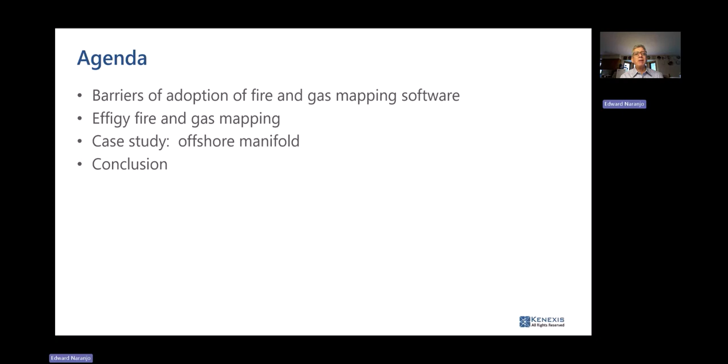In the agenda for today, I'll talk specifically about some barriers of adoption on fire and gas mapping software. This is important for us to keep in mind because it will drive the context of the rest of the presentation. I'll talk also about what is particular about Effigy that makes it well suited for fire and gas mapping, and for addressing those very challenges that I mentioned in the previous section. I will have a case study of an offshore manifold that will speak on how Effigy can work and how it can make a certain difference vis-a-vis other fire and gas mapping tools. And then I'll have some concluding remarks.

So to begin with, there has definitely been a step change in addressing detection coverage when we use computer models. Before computer models, we were relying on heuristics, best practices, certainly some rules of thumb that had some basis on science. For example, the molecular density of a gas, some calculations on radiant heat output for fire, the size of the fire, for example. But there are so many different variables to consider that no one heuristic method can fully address those complexities in a chemical process environment, most of which happens to be outdoors.

So when computers began to become more available for these particular types of applications, certainly something great happened, and that is the development of full scenario calculations that allowed us to understand precisely the effect that having detectors at a particular place would have in the reduction of overall risk.

Understanding also, and I would say manipulating the information in a way that could not have been done before, whether it was through such techniques as volumetric monitoring, point source monitoring, or even path of travel and target receptor monitoring. All of these are very useful heuristics, but they do not hold a candle to computer models.

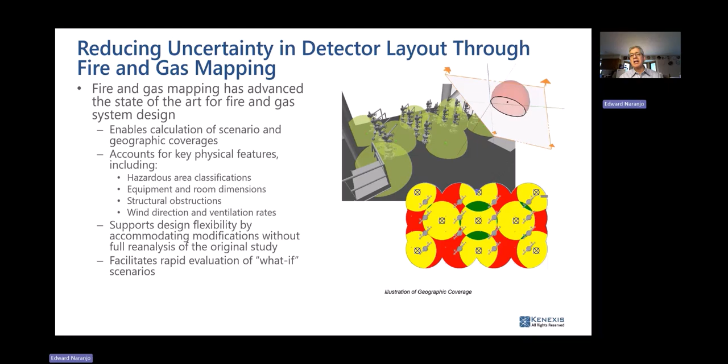That's something that is quite difficult to do for the previous methods. And lastly, I think that something that is very difficult to do on heuristics is to do evaluation of what-if scenarios. If you have a particular change that is coming, if you are creating, for example, a new process facility that is adjacent to the one you have, and you want to calculate what effect that will have. If you're adding, for example, a new piece of equipment, how will that change the obstruction of the space? All of that is much easier to do when you have a 3D model and you are able to calculate scenarios and detection coverages based on that.

Now, the other thing that we are, I would say, grateful for as a process safety profession is the advancement of standards related to fire and gas mapping. The first one that comes to the fore is a technical report, ISA TR84.00.07, which is the guidance on the evaluation of fire, combustible gas, toxic gas system effectiveness. This one is modeled after IEC 61511, or ISA 84, and it uses the assessment of risk and risk reduction almost as a basis. So if you are familiar with IEC 61511, there are certainly some similarities between the technical report and the standard.

Another standard, or norm, that has advanced our state of the art is Annex B of NFPA 72. The National Fire Protection Association has had the National Fire Signaling Code for many years, and it is one of those prescriptive standards by design. But over the years, it has added Annex B, and developed it further and further. And if you look at Annex B, it really has become its own performance-based approach, and it in itself is based on a handbook by the Society of Fire Protection Engineers. So it's very good that we're seeing the advent of these performance-based norms.

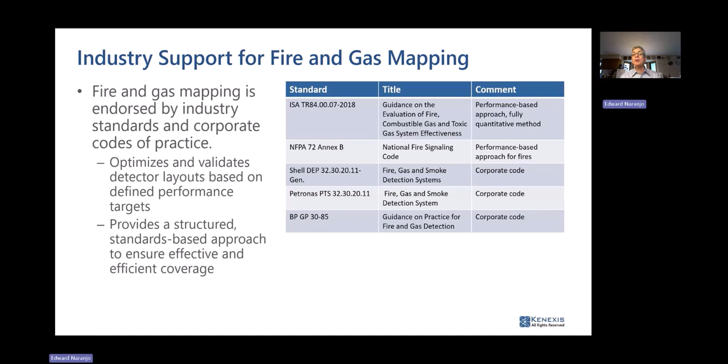And I would also have to give credit to some early pioneers in the business, like Shell and BP, who have developed their own performance-based codes within their corporate codes of practice, and those are listed here as well. So I would say we cannot look at computational models in isolation. They are in fact driven by the way in which people must behave and the documents that they must produce as a result of a particular type of action. And those are really codified in these standards.

However, despite the advent of computing and the advent of very good standards, there are a number of challenges for the implementation of fire and gas mapping tools. You would think that, especially now, there would be widespread adoption of these type of digital tools. That is not the case. And there are certainly some barriers that we must address.

One of them, at least in my view, is the perception of a requirement for specialized technical expertise. Certainly, computer models cannot be done or managed by people who have no particular education. It does take some amount of training. And I would say that has led some lay people in the industry to think of this as being a niche field.

Also, there is the notion that there's a high cost for implementation of these fire and gas mapping tools. I hear this quite a bit. I go into the field and someone is asking, well, I believe that we need to map this particular space. I don't feel confident here. However, I am just going to use what I know, which is my rules of thumb.

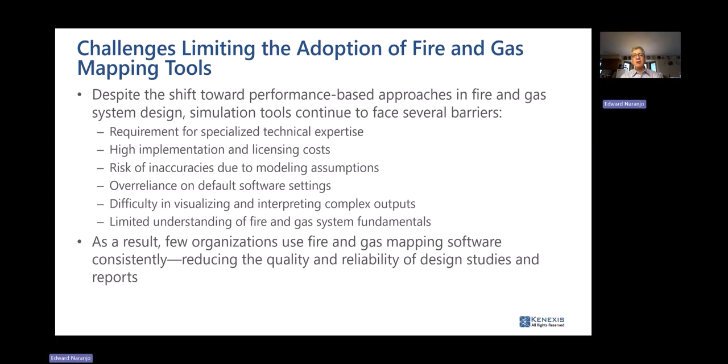So what can be done about it? Well, at Kenexis, we have taken an approach that I think is quite suitable to address these challenges, and our software tool does that particular job of addressing these challenges. Let me refer to them one by one.

The first is that it integrates the workflow of ISA TR84.00.07. That's important because having that structure allows the user to see that fire and gas mapping is not about fire and gas mapping only. There is a process. In fact, the modeling is just one step out of several that need to be done for a fire and gas hazard assessment. I think this is important because you cannot take 3D models and computation in isolation. If you use the norms as a guide, that will help drive that context.

So as pointed out here on the workflow, one must identify areas of concern, must identify the risk. One of the important parts is to assess and mitigate hazards or risks. So you have to know what is your hazard and what are the consequences of those hazards before applying your safeguards, in this case your field devices, your array of field devices, placing them in such a fashion that they will help reduce a certain risk. And then you need to calculate what is going to be your fire and gas system effectiveness after you have established those detectors in that place, the fire and gas system effectiveness with mitigation.

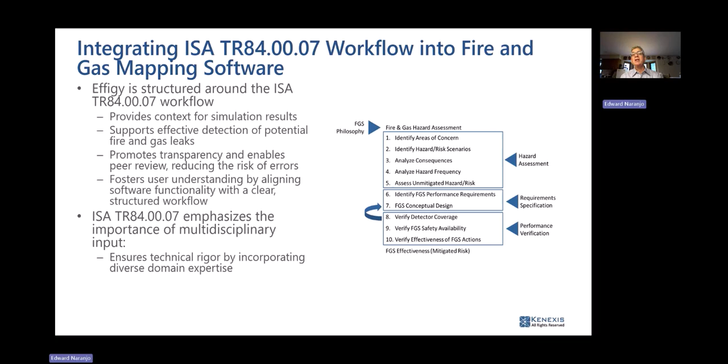So a second way in which the tool addresses the challenges is that it is fairly accurate because it relies on physical properties of the gas and the fire in order to model their particular risks. This is extremely important. In the specific case of Effigy, it uses radiant heat emitting bodies, the energetics of fire, as an input for fire and gas mapping. This is important because a majority of fire and gas mapping models, certainly those available commercially, use what is called a ray casting method.

Ray casting means that it relies on consideration of obstructions and space. If a detector is obstructed in its field of view by an opaque object, then the understanding, at least in the model, is that there is going to be no coverage or no detection behind that object. This makes perfect sense in a variety of different cases, which is why a number of tools use it.

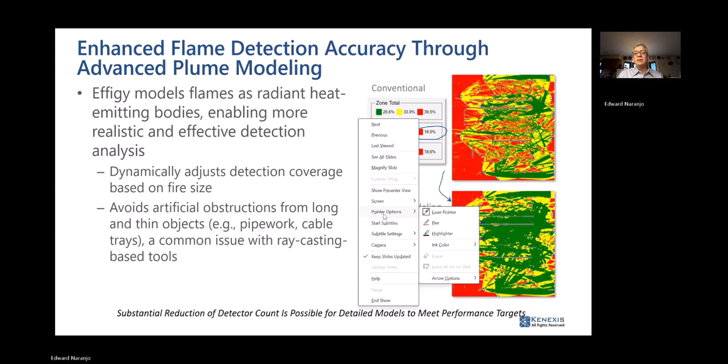Another advantage that I see with the use of Effigy as a modeling tool is that at Kenexis, we are not only the developers of the tool, but we are their first practitioners. As a matter of fact, I think our company has been a pioneer in fire and gas mapping. It has used fire and gas mapping for well over 15 years.

Ed, as well as others, have been voting members of ISA TR 84. In fact, many of the principles that the company applied were incorporated into the technical report. We have a number of studies that we have conducted over the years, over a wide variety of industries and several different processes, and it has been that experience that has informed decisions on the development of Effigy.

So it's not a tool that was developed in isolation. The company's employees are first and foremost engineers, and I think that shows on the final tool. Another advantage I believe you will see is that the field devices it models are not only your conventional flame and gas detectors, but also newer types of devices such as infrared gas imagers, ultrasonic gas leak detectors, as well as open path toxic gas detectors such as the ones made from tunable diode lasers.

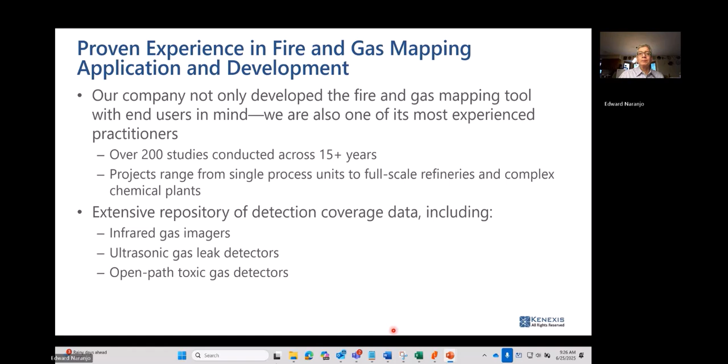Another innovation that I think helps the adoption of fire and gas mapping is that the tool is cloud-based, meaning it uses servers that are outside of a desktop. The very first tools developed in the early 2000s were desktop computer models, and they have several limitations, especially for some of the most complex fire and gas mapping projects.

It's certainly very, very difficult to do it on a desktop, even in computer rooms that were on premise at the time. And some of these computations can take days to do.

You will see right now, if you have had the chance of using Effigy before, most of the computation can be done in a matter of minutes, certainly not days upon days in a row. And that does make a difference when you're working on a project, especially when you have to work on a deadline where fire and gas mapping is just one of several tasks that need to be done.

Effigy leverages the Microsoft Azure high-performance computing framework, and it just makes resources available. I don't think that we have ever been constrained by using high-performance computing from Microsoft.

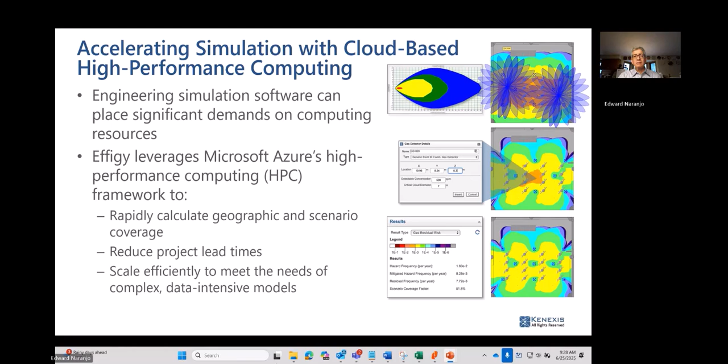So all of this is fantastic. You can see that these are certainly some reasons for removing such barriers as the ones that I mentioned earlier. But the proof is in the pudding. What can we do in a real life scenario?

I wanted to show you one, and that is a fire and gas mapping project that we had on an offshore oil platform. As you might imagine, the platform is producing crude oil, and crude oil comes from the ground as a mixture. It's not only crude oil itself, it's a two-phase fluid. It has water, it has natural gas. It probably has a number of other impurities.

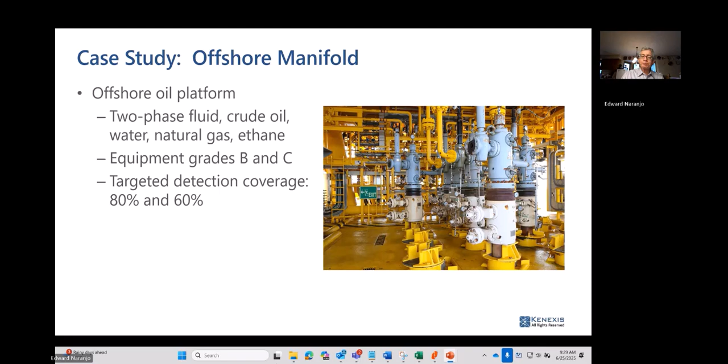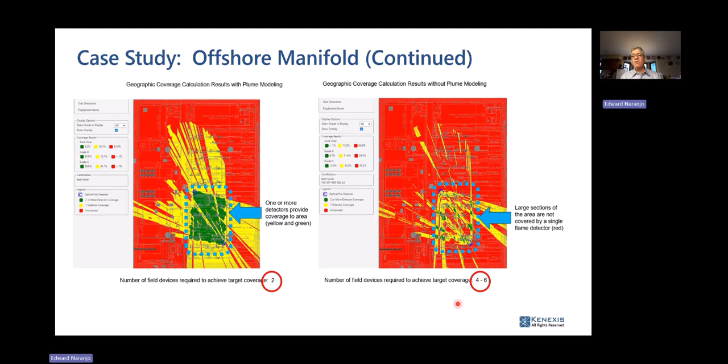So with that, I just wanted to recap some of the important points. I would say fire and gas mapping software has been a tremendous advancement for process safety. It certainly has increased the certainty around the layout of flame and gas detectors, and it is head and shoulders above heuristic and even prescriptive approaches.

That being said, adoption is still a sticking point. There are a number of challenges: there's complexity, there's cost. And I think in many instances, it's just the idea that computation can be done without regard to other steps that are needed for good mapping.

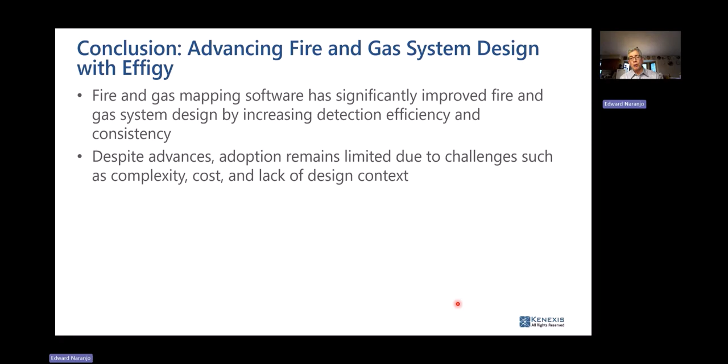I would posit that Kenexis Effigy software addresses many of these challenges head on. It follows a premier norm, the Technical Report 84.00.07. It uses the very same framework, and that framework helps give guardrails or guidelines to the end user, so you're not using the software indiscriminately. The software itself guides you through the process. I would say it also fosters collaboration across multiple disciplines.

I pointed out how detection coverage is improved as a result of the Plume modeling approach that we use. As a result, far fewer detectors are needed in installations that have long, thin obstructions. And lastly, it uses hosted servers that make it easy for projects to be done in far shorter lead times than either on desktop models or even on-premise servers.

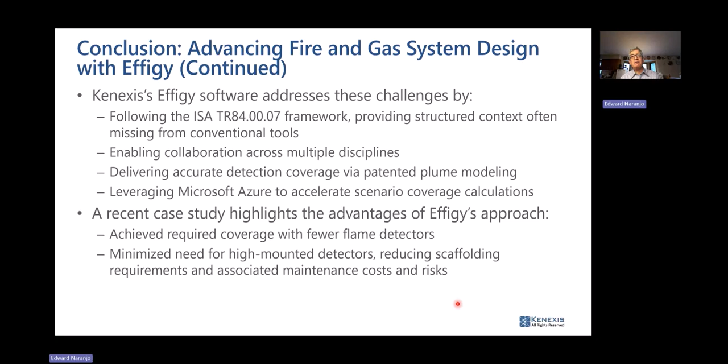The case, I think, is well illustrated with the offshore manifolds, where we achieved detection coverage with only 2 flame detectors in an area where 4 to 6 flame detectors would be needed otherwise. I cannot underscore this point enough, because especially when it comes to an offshore installation, there is a significant cost associated with every additional flame detector or any device that is added. It's not only added weight, it is added maintenance, and it is far beyond the cost of the actual device itself. Any questions?

We've had some questions in the chat here, Edward, that Ed's been addressing. So I'll just mention that there are some questions around some of the settings in Effigy to adjust sensitivity regarding modeling of flames as radiant heat emitting bodies.

The response is yes, it's an input for radiant heat output, and it's a requirement for the fire modeling. You can adjust that as well to analyze a specific scenario where you want the fire detector to be more sensitive. That is absolutely true.

So Effigy has a database of detection coverage and specifications for a number of commercial flame and gas detector models. For flame detectors, many of the commercial models have sensitivity settings. That's not unusual, they typically have 3 to 4 sensitivity settings, and those could be adjusted. Of course, those are going to change detection coverage.

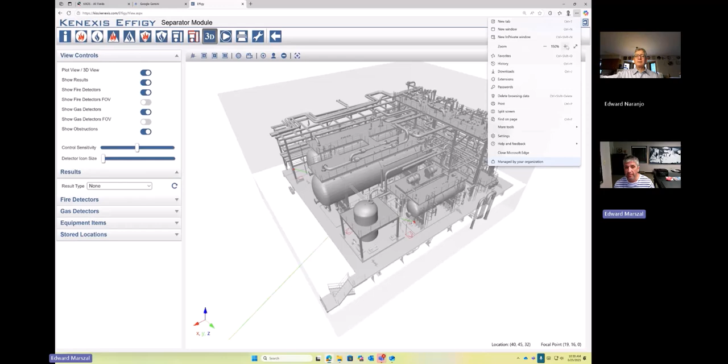A view of Effigy. I'm just looking at a separator module here in the 3D view, and you can see that I've got a few fire detectors laid out on the screen here.

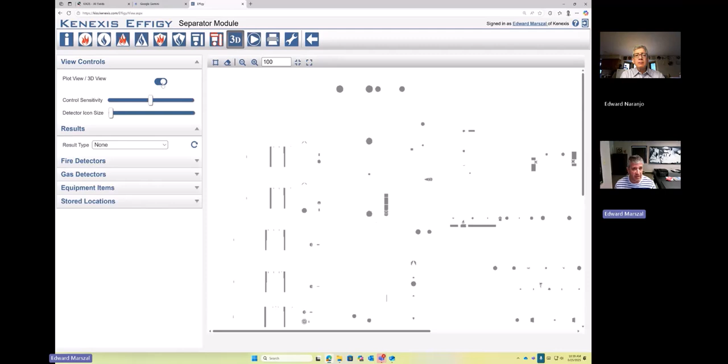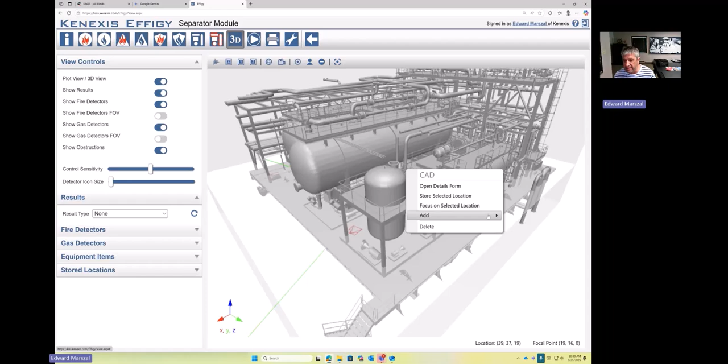Now, you can see the detectors and the mechanism to lay them out. There's a million different ways to lay out detectors. Probably the easiest one is to just look at a top-down view, then right-click and add a new fire detector, and it'll put the detector in that location. But if you want to attach to pieces of equipment, using some of the more sophisticated 3D tools to add equipment onto surfaces and so on, that's a better way to do it.

But with regards to the specific questions, you see there are some detectors around. So over here on the left-hand side, you're going to see a list of the detectors. The first one is fire detector 1, and I could click on it to open up the details.

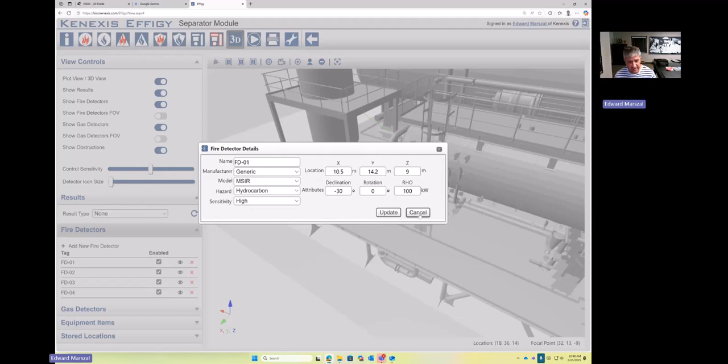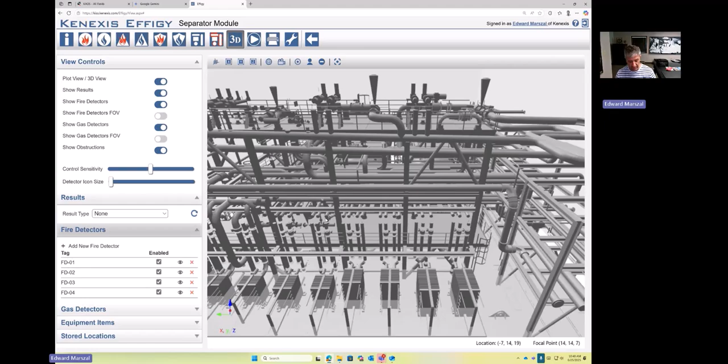But before I get into that, you'll also see this eye icon, and when you click on that, it's actually going to put you inside the detector so you can see what the detector is looking at. As I scroll back, you see the back of the detector and where everything is at in relation to the full 3D model. You can go back and look around, and you'll see that this is a really densely packed area, but there's still a lot of spaces where you can see detection.

Now for the detector itself, when you click into the form, there's all kinds of things you're going to define. First off, when I just did a right-click on the plan view, all it knows is the X and Y coordinates. When you do the more sophisticated 3D approaches to attaching the equipment, that's going to give you the Z direction also.

There's a declination angle, which is the angle from horizontal, so minus 30 means we're pointed 30 degrees down from horizontal. Rotation is about the XY axis.

And here is the answer to that first question that was in the chat, which is, can you define how big of a fire, essentially? So 50 kilowatts is a number that's used in a lot of corporate standards, and that comes from the FM 3260 test, which arbitrarily is a 1 foot by 1 foot pan of heptane. Now, 50 kilowatts is an approximation - it's actually closer to about 43 kilowatts that size of fire is kicking out.

So if you want to detect a smaller fire, like maybe one that would fit in this cup, that's going to be maybe about a 10 kilowatt fire. Whereas if you're in a big warehouse application, you don't care about the fire until it gets really big, so maybe you'll want to use 300 or 400 kilowatts. That radiant heat output setting is going to change the dimensions of the cone of vision using thermal heat transfer calculations, radiative heat transfer calculations - whereas our competitors who are just using ray tracing, all they're doing is geometry.

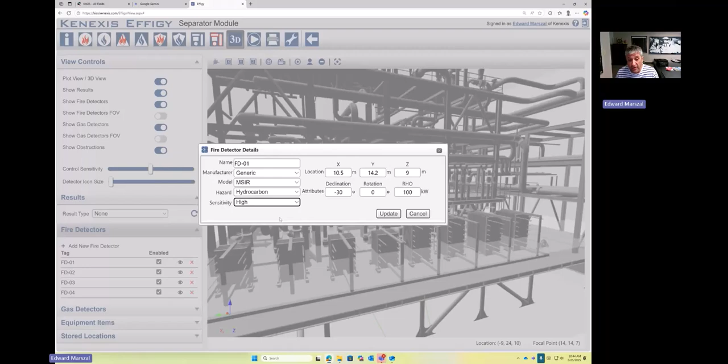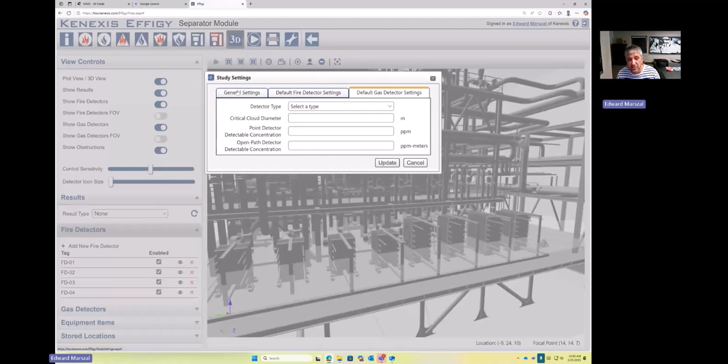Now, the last question had to do with settings. So right up here is the action ribbon or the navigation ribbon along the top. You can click on the study settings button, and it's going to give you default settings for fire detectors, default settings for gas detectors, but then also the general settings of how the software works. So you could do all kinds of customization, like showing tag numbers on the drawings, tool tips, determining the different types of styles of icons that you want to use for your detectors.

And then ultimately what we were talking about here was point source versus plume. Point source is something that is going to be more akin to a point-by-point ray tracing that doesn't consider fire size, which is kind of the state of the art for our competitors, but is the absolute worst level of performance for our software. You can make things much, much better.

So instead of using point source, you can use Plume. And when you shift to Plume, you're going to need to define what the plume size is. Typically, if you're using 50 kilowatts, that's going to be representative of a 1 foot by 1 foot pan fire, which at its base is going to be 1 foot by definition, so about 0.3 meters. And the height is going to be about 3 feet, or about 1 meter, is what you would typically use if your target fire is a 1 foot by 1 foot pan.

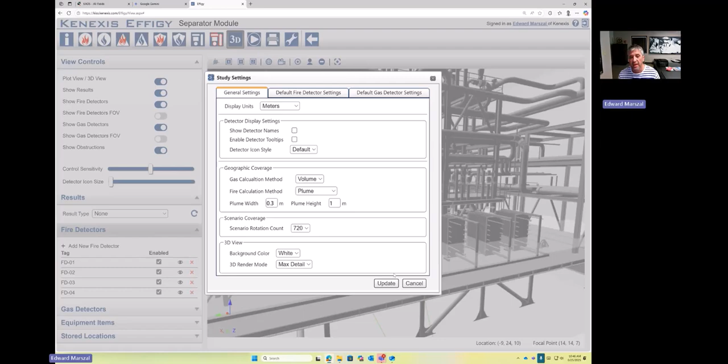So then you hit Plume, you do that, you hit the update button, and now we're in the plume detection mode. So I believe I answered all the questions about how you modify the settings for different fire sizes and the use of plume. Did that sufficiently answer the questions? Or did I not get to the answer?

I think you have answered that. We did have another one come in. When you set the result type in the 3D model view to fire geographic coverage, could you limit the coverage results shown to be only limited to your desired grading area instead of showing the whole area?

Okay, since I hope you don't mind me stepping on your presentation, Edward, but I had the software up on my computer. Yeah, no, go ahead. I think people like to see the software illustration in action. Yeah, so when I go to result type, I can show...

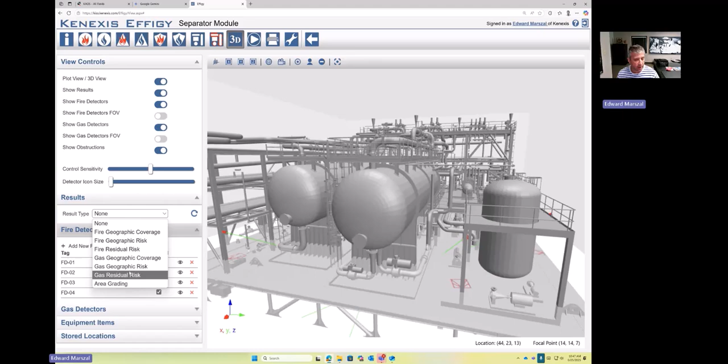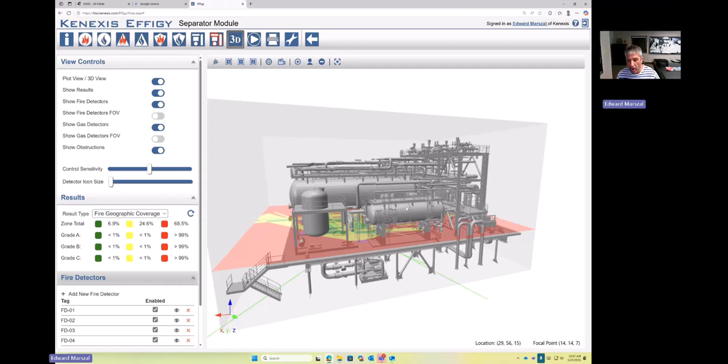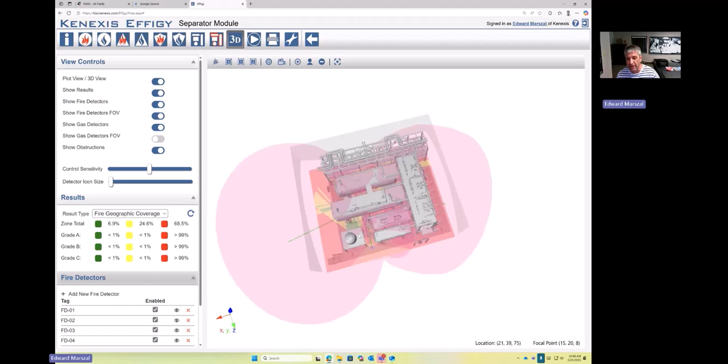Fire geographic coverage is the way we commonly do things. And again, now we're going to be displaying our results for the plane that we selected, which is the elevation — I'll go back in a second and show you that. Now, even though we're showing results on one elevation to make it feasible for you to work with, we can show you those results fully in 3D. So if I show the fire detector cone of vision fully in 3D, there it is. I don't know what you're gonna do with all of that information.

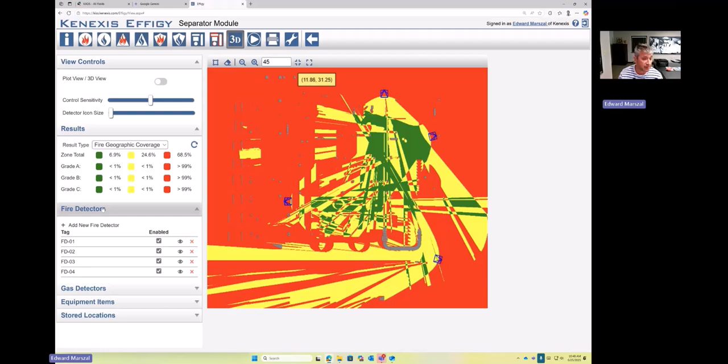So that's why we tend to put things down on the two-dimensional level. If I could see that on 2 dimensions, this is a little bit easier to look at. Now, the question was, what does that mean for the graded areas? Honestly, I don't even know if I defined any graded areas here.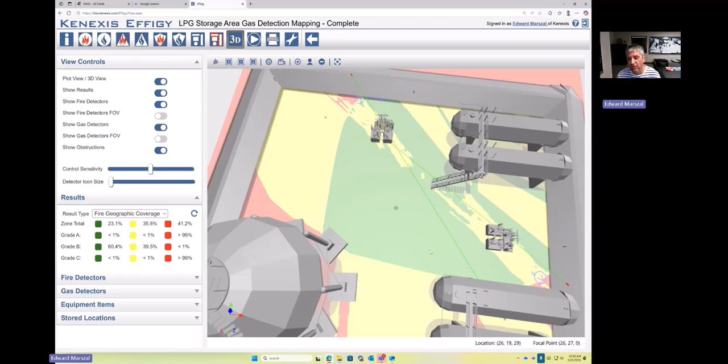Now I'm going to go to this facility, which I know has graded areas and also has fire coverage. So there's my area grading. And if I look at my fire geographic coverage, it's for the whole plant, but the graded areas are actually very small. Now, if I only want to see what the coverage is in the graded area, I'll have to go to a different view where I look at the fire geographic coverage in its own special 2D.

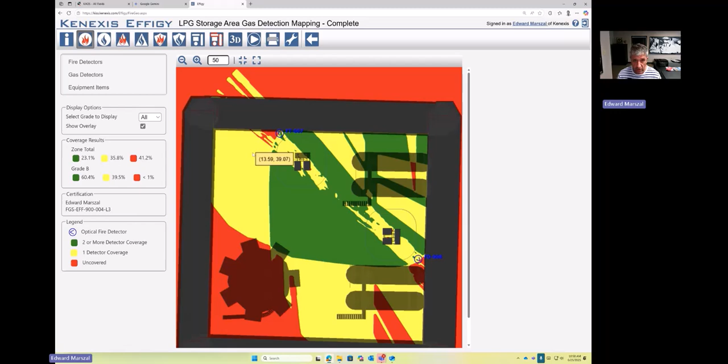We're only looking at the results in 2D at this point in time. And what I can do in this view is show one grade at a time. So here we only have grade B coverage, so I could look at the grade B coverage in isolation. This is only available on this view in the 2D format. When you're looking at it in 3D, you're always going to see the entire coverage results for everything.

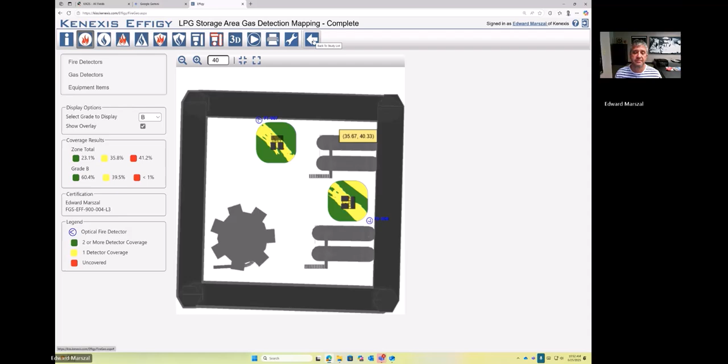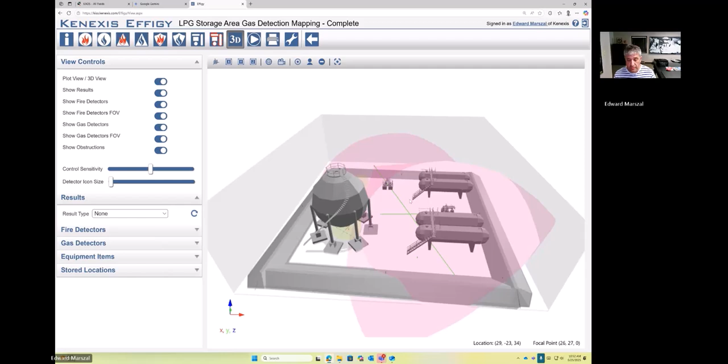I think that what you have done as an exercise also underscores that original challenge I had listed, which is that oftentimes people have difficulty visualizing and interpreting complex outputs. You have shown how by using just 2 dimensions, you're simplifying something that could be very complicated by showing the full 3D detection coverage. That is actually harder - I don't know what you would do with it. I would not show that to, say, my manager after I do a project and say, because of this, I'm going to put 1 or 2 detectors. It's much easier to present the information on 2 dimensions.

Absolutely. Okay, looks like we have another question out there. Yes, please go ahead.

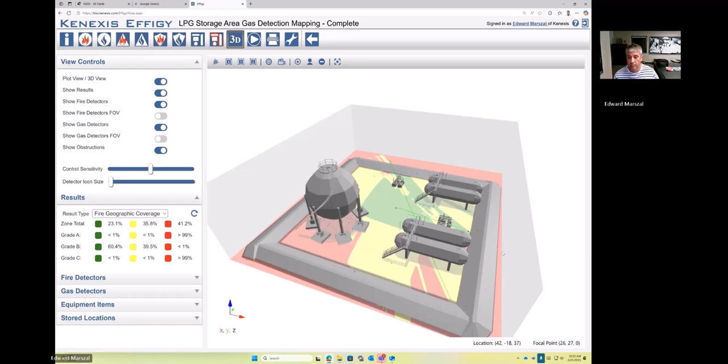I just want to ask about Effigy - does it have that feature? For example, if I have a piece of equipment and I want to achieve 90% coverage for that specific piece of equipment, will Effigy itself place the flame detector automatically, so no need to do it manually? Will it give me the best location to place these flame detectors to achieve a higher coverage target - like optimization or scenario based? Or do I have to do that manually to place the flame detector in each location?

Okay, optimization is possible. If you wanted to do a quantitative optimization, we've done some work with Sandia National Laboratories to incorporate their Chama engine for a full linear programming optimization of the positions of the detectors, which is better than some of our competitors using a genetic learning algorithm, which is prone to false positives. A genetic algorithm - it's very rare that it will actually get you the optimum, it will usually get stuck in a local minimum. Only linear programming is truly going to allow you to get to an optimal.

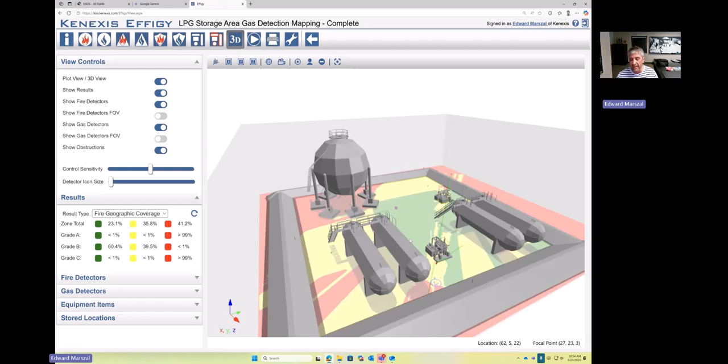But the problem is, every time we've run an analysis using the mathematical optimum and presented it to a technician who has to install, maintain, or repair this device, they will laugh at you because it will be such a bad design. Ultimately, the optimization of coverage is a small factor compared to other things that are more important, like: how am I going to get power to the detector? How am I going to mount the detector? Once it's in place, how am I going to maintain it? How can I reach it with a ladder to perform maintenance? And where it's located, is it obstructing other equipment? Is it in the way of normal operations to move around and access the rest of the facility? All those soft factors mean the mathematical optimum is usually an absolutely horrible place to put it from an installation, maintenance, and usability perspective. So even though we have the algorithms to do it, we don't make them publicly available because they generally result in very bad designs.

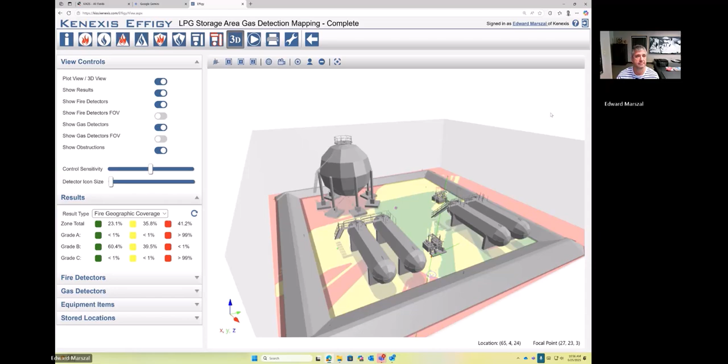Yeah, that is a fantastic point, Ed. I think that lack of understanding of the practical aspects of detector siting is just one of those obstacles. At some point, like any other tool, you have to use fire and gas mapping as an input. This is where you, as a process safety professional, need to apply some discretion and figure out what is optimal based on maintenance and calibration of that field device.